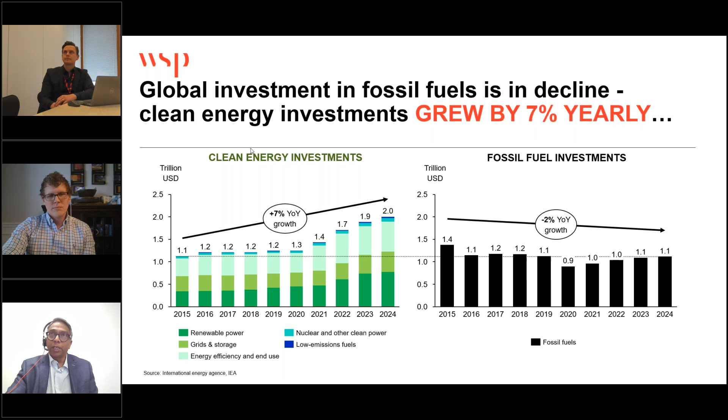And this is driven by the growing demand for energy, with the electricity demand far exceeding the GDP growth. GDP growth is at 3.2%, and you see the electricity demand growing at 4.3%, which is good. It could be led by electrification, but it needs to be the clean energy source of electrification.

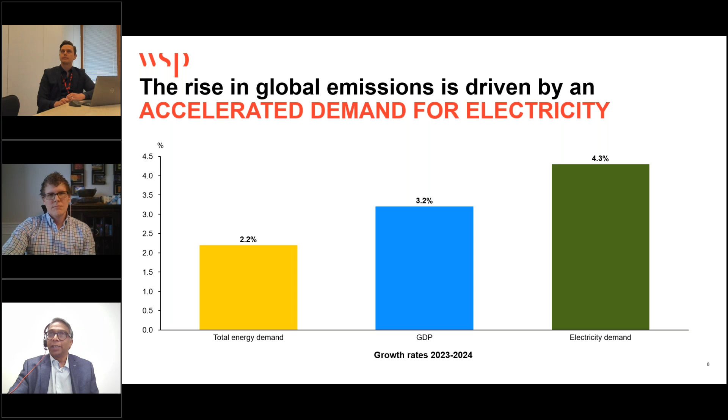And when you look at some of the high-emitting sectors, transportation, industry, and buildings, we are falling short in our decarbonization efforts, assuming that we still want to meet some of our 2030 targets when it comes to emissions reductions. That tells me that we need to do more than what we are doing and explore other strategies, hence the need for demand pull strategies.

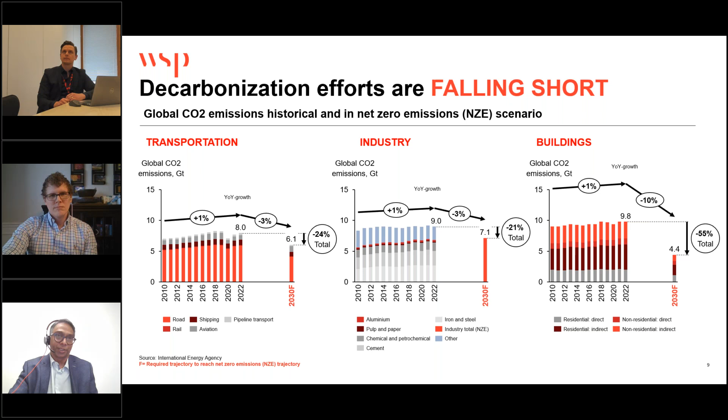Before I get into a little more detail on why the need for the shift, let's have some brief definitions. When we talk about supply-led strategies, these essentially focus on increasing the availability of low carbon solutions, as we talked earlier about renewable power solutions, hydrogen solutions. There are policies towards incenting more infrastructure build.

When we're talking about demand pull strategies, here the focus is on creating demand for low carbon solutions. And that's where we see the policies and the strategies need to be enhanced further.

Why the need for the shift? I think we've seen from the chart, it is very evident that progress is not adequate. And it is also fair to say that the supply side efforts can only go so far without demand from consumers, businesses, or industries. There is insufficient focus on the demand reduction side. Sometimes we have over expectations of these emerging technologies like hydrogen and others, which have less history, and they are challenged currently with offtake agreements.

We fail to account for some of the broader structural changes that are required across the energy value system, for example, all the enabling infrastructure that is required. And we are falling short on removing some of the socioeconomic barriers and moving slow on some of the regulatory issues as well. Finally, the need is so significant that the scale of change required is enormous.

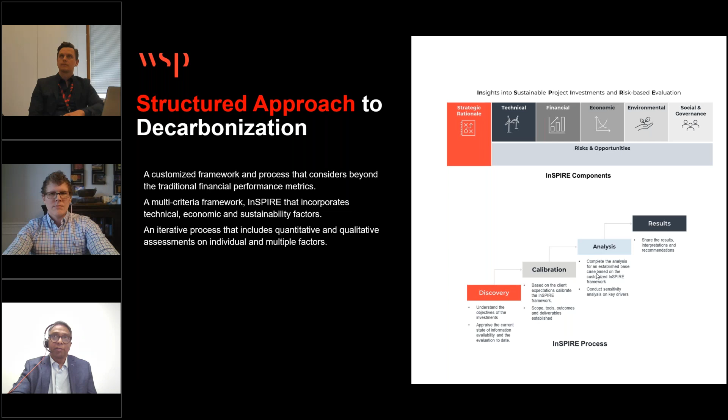That's one way of looking at demand. And how do you go about evaluating these various options? At WSP, we have a framework we call InSPIRE — a very customized, multi-criteria framework that goes beyond traditional financial metrics. It incorporates economic impact to the region, sustainability factors, and various risks, and identifies and evaluates all the options discussed earlier. Then, through an iterative process using qualitative and quantitative analysis, we assess the options on individual and multiple factors. Very straightforward — you identify the options and evaluate them on a multi-criteria framework.

I think this will become more evident as we discuss some of the case studies today. I'll start with decarbonization of mining operations, and my colleagues will talk about the other two case studies as well.

For the first one, let me give some context. It's very interesting when you look at the mining sector in the energy transition — most clean energy technologies require critical minerals, and to mine critical minerals you need significant energy consumption. So that energy has to be clean, otherwise it's a sustainability paradox: you need clean energy technologies to get critical minerals, but mining critical minerals requires more energy, so we better ensure that energy has less emissions.

And when you look at emissions from these minerals, the average emissions intensity for production is high, so there is a strong need to mitigate this upward pressure on emissions from mineral production.

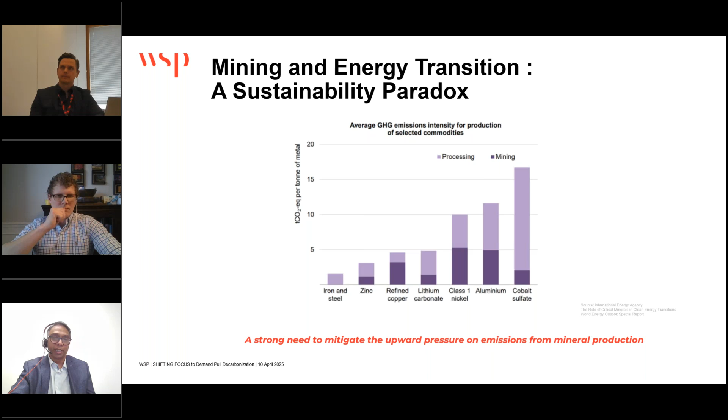The case study I'm referring to is a mining operation in Eastern Canada, where energy needs for both thermal and power are currently met by diesel, since it's a remote area — that's the typical choice for remote communities and remote mining centers. The client's requirement was to meet some of their targets for 2030 and beyond, so we were engaged to look at alternative options.

We looked at 8 different technologies: biomass, tidal, nuclear SMR, biofuel, solar, hydro, wind, and even transmission and distribution from far-off clean energy sources.

Using the frameworks I discussed earlier, we went about it in a structured way — looking at their energy needs, forecasting for the life of the mine and beyond, looking at the 8 technologies, their execution plans, estimating the capital and life cycle operating costs, looking at GHG emissions over the life of the mine and beyond, and doing traditional financial modeling incorporating some of the carbon attributes as well.

We also looked at the socioeconomic aspects of developing nearby indigenous communities, maybe after the mine closes, as there may be value in transferring these energy systems over to the indigenous communities as well. We used our InSPIRE multi-criteria framework assessment to come up with some recommendations.

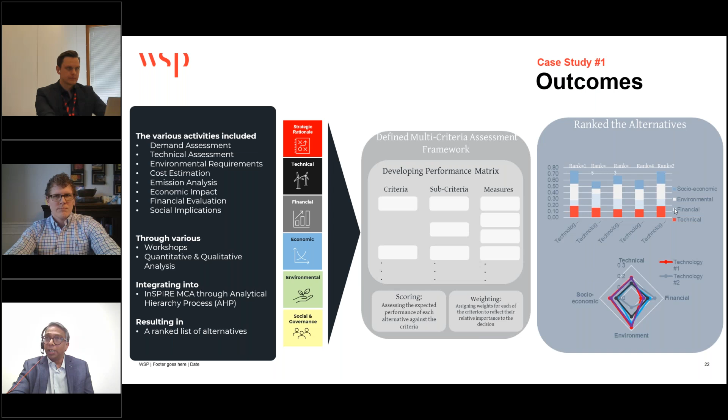So it is evident this is a good example of a demand pull strategy. We were not pushing any particular technology. We were technology agnostic, evaluated from a demand perspective, and looked at how we can reduce emissions at the mining operations. Hope it gives you some context on one of the ways sectors could use a demand pull strategy.

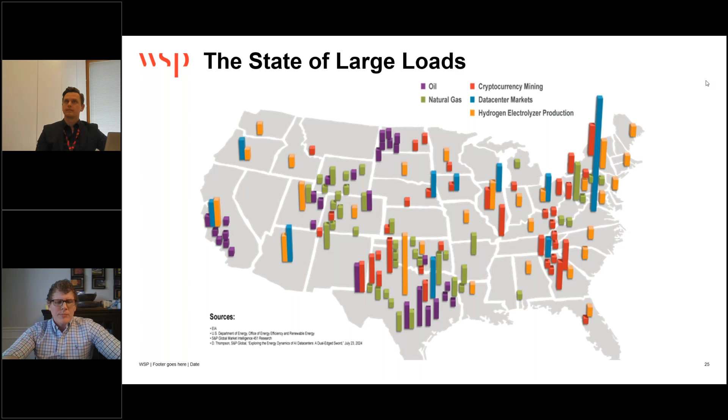Certainly you can see the very significant bar up there in Northern Virginia that's referred to as Data Center Alley, which we'll talk a little bit more about, as this became a recent incident review up at the North American Electric Reliability Corporation level. But you can see concentrations of these coming up.

Due to significant growth in demand and a fundamental mismatch in timelines between when you can bring on new generation sources, when you can expand transmission capacity, and the 18 months or less it takes to stand up a data center, there's a need to bring out of retirement or delay retirement for coal plants and nuclear energy. There's already talk of bringing Three Mile Island out of mothballs, modernizing it, and getting that power back to the grid. Some regions already project shortfalls due to this discontinuity as early as 2027. There's a fundamental mismatch between the pace demand is growing and the pace supply can be brought online and connected to that demand.

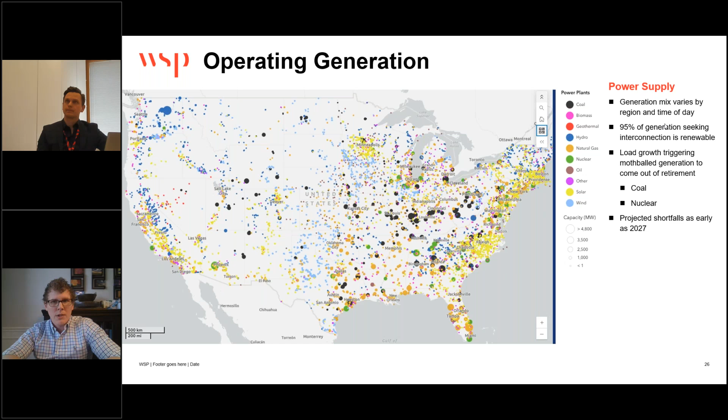If we can go to the next slide. One thing to highlight is the methodology we use when considering the impact of a large load interconnection. I'm coming from a transmission planning background, so I'm familiar with looking at the grid, interconnecting generation, interconnecting load, and the reliability impact of this - what generation will be dispatched to supply this while honoring all existing transmission services already designated for the grid, because we have a limited amount of capacity. Some of that's already spoken for, and the pace of demand increase is outpacing the availability of capacity of the system.

A lot of this starts with the interconnection application for large loads. Different regions require defining nuanced characteristics - ramp rate, size, scaling, your protection systems, operating systems of any behind-the-meter resources you might have. You can take a look at this serially, looking at each sequential received load interconnection. With clustering, as I pointed out with Data Center Alley previously, this represents dozens of different customers that have interconnected. You can look at that one-by-one or lump them all together.

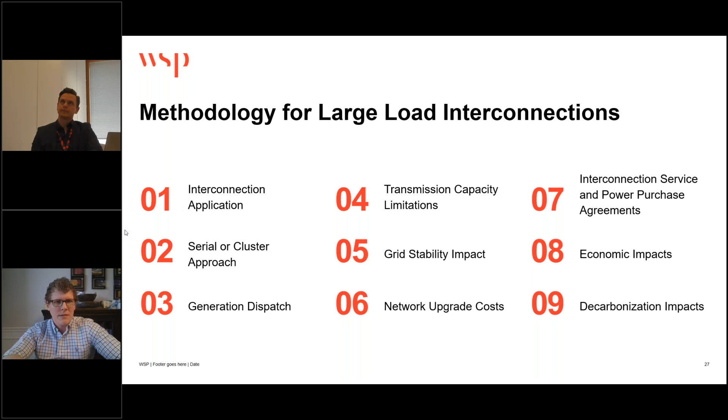There's also negotiating through interconnection service and power purchase agreements to provide this support - economic impacts, how all this is funded, and decarbonization impacts. Where you're bringing all this on, you're potentially delaying retirement for coal plants, and how is this going to impact the overall carbon footprint in a region and of these specific data centers? If you can go to the next slide, this is an example of an event that happened in Data Center Alley.

This is from last summer - roughly 60 different data centers all removed themselves from the grid and went on to internal power supplies all at once, in response to a fault scenario that cleared from the system following normal protection operations. This is a challenge for system operators trying to maintain balance between supply and demand, where they don't have visibility into what these data centers are doing, and that's essentially a challenge for the modern day. This was 1,500 megawatts - we were just talking about a study for more than double that.

You can go to the next slide. I'll try to wrap it up and pass it on to Frederick, but essentially the big point is the scale at which all of this is changing right now. There's change on the generation front, the transmission expansion front, and the rate at which demand is increasing. That makes for a very hairy situation, one we're all working on better developing. There are challenges with cost allocation, significant concerns with shifting data center locations and the risk of stranded assets, grid reliability issues, and how to balance the risk and impact that generation resource availability and adequacy are having on the system. So with that, I'll pass it on to Frederick.

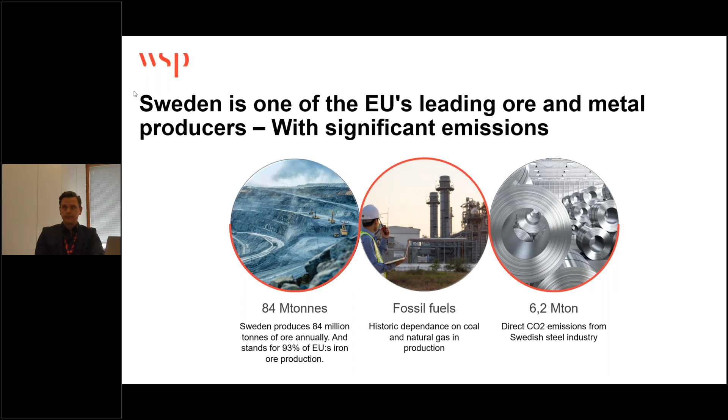In recent years, we've seen quite significant external pressure pushing Swedish metal producers to transform into more low carbon technologies, both from a national, European, and global perspective. More ambitious climate policy has direct impacts on metal production.

For example, in the EU we have the EU ETS, the emission trading system, which puts a price on emissions. This has a direct impact on the profitability of metal producers, which are high emitters. We also see indirect pressure from customers seeking to transform their supply chains, requiring more sustainable, high quality metals, which also impacts producers who need to comply with those customer demands.

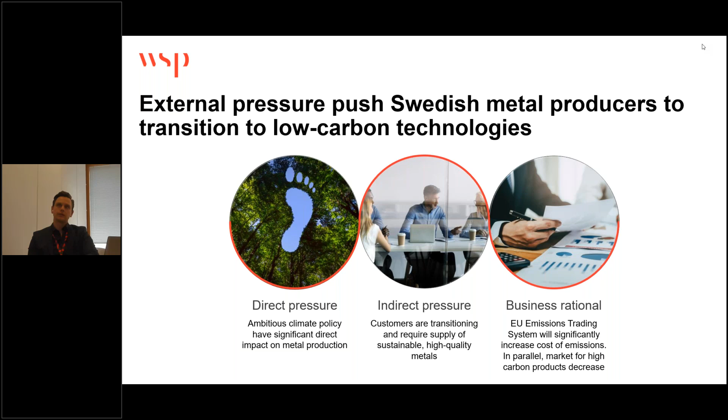So from both perspectives, there's a quite significant business rationale to transition into more low carbon alternatives. Both the direct and indirect impacts push producers to transform to more sustainable alternatives, and we see the market responding to this.

These are some examples of metal production projects where we see a clear market response, with announcements of significant projects currently ongoing in Sweden. Perhaps you've heard of H2 Green Steel, now called Stegra, which is one example. We also see SSAB, a large steel producer, with new technology development going on. But the main shift in Sweden right now seems to be toward hydrogen and electric furnaces for these types of applications.

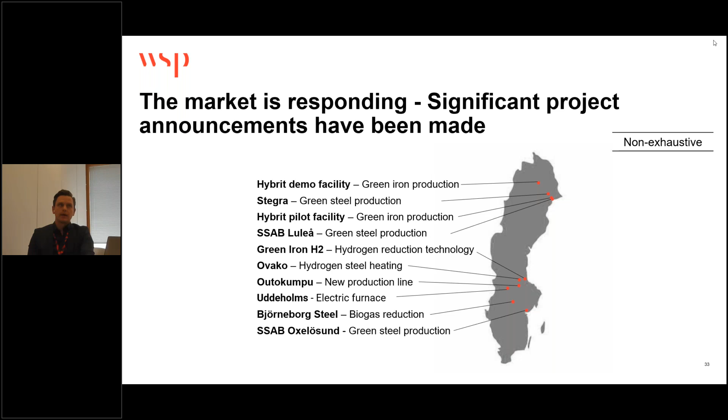Moving on to the specific case we're going to look at today: this is a case where we had a client, a quite large metals producer, with a tradition of fossil fuel operations using coal and oil in their production, with a correspondingly very large climate footprint.

They identified that the regulations I talked about, both the direct and indirect impacts, will necessitate them to consider decarbonization options to meet targets for 2030, but also moving forward into stricter policies towards 2050. This needs to be done in parallel with keeping minimal impact on both operations and product quality, and from a business perspective, it needs to remain sustainable to keep a profitable business. But the need for change is so overwhelming that this is something they need to pursue.

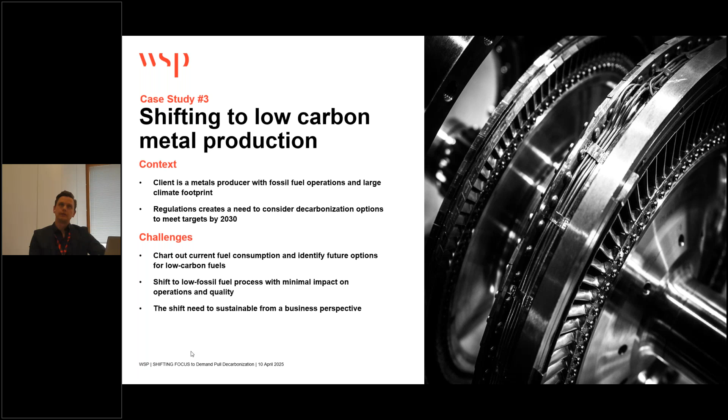Looking at how we helped our client with this, we utilized a quite structured process to guide them through it, starting with mapping out the current and target states, where we needed to understand the current situation, what they're using and in what quantities today, and setting a clear ambition and target state across different years in that process.

The next step was a thorough technology screening, exploring what alternatives exist for this specific type of metal production, and mapping out the feasible technical options available to this specific client.

This was very important in every aspect of this type of large transition. You need to look at the viability of this, you need to explore the business case, and how attractive are the different options, both in terms of sustainability performance, because the target is to have a more sustainable production to meet the set climate ambitions and sustainability strategies, but also from a financial perspective, because you want to have a profitable business but also a price level of your end product that the market can accept.

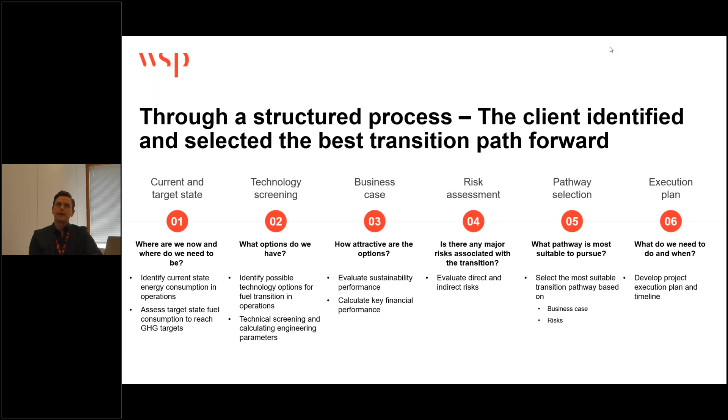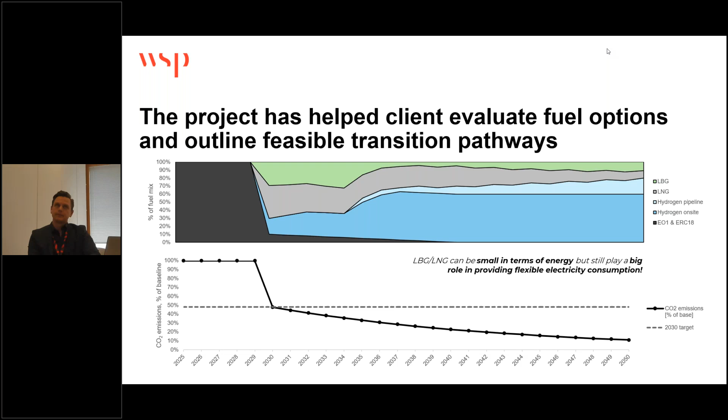To summarize, what we did was help the client gain a better understanding of the current situation and the pathways forward. We helped them understand the business impact of their different alternatives on the market, and helped them make data-driven decisions on where to go from here, and finally understand what needs to be done and when they should make different shifts in their production line. That's an overview of this specific case.

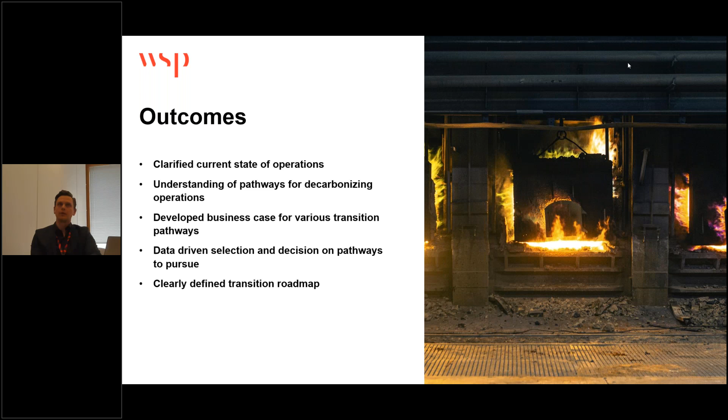To wrap up the webinar, the key enablers for demand pull need to essentially be around policy, system thinking, and behavioral change that we discussed. Hopefully through the case studies and overview of demand pull strategies, you were able to understand the need to work on the demand side strategies too. The key takeaway is that we need a combination of both strategies, but right now the policies and strategies seem to be more skewed towards a supply push rather than demand-led strategies.